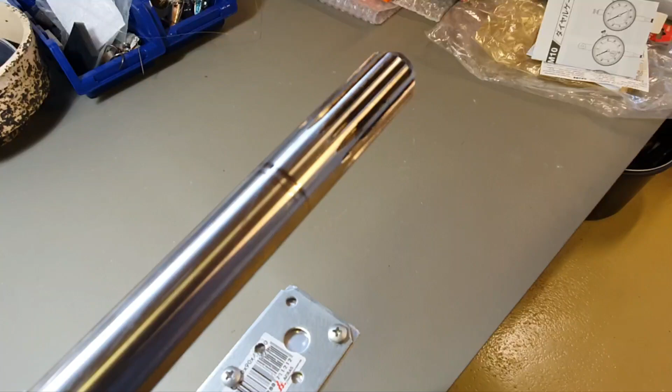Spoiled everything right in the beginning, but actually there will be a lot of specific things you should take into consideration when you design this.

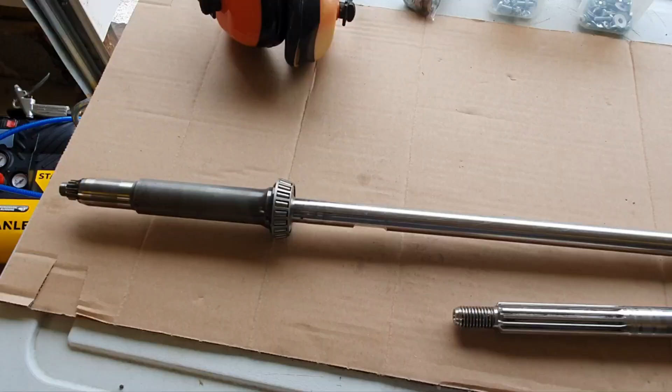So let's go. I got the need to check the drive shaft and prop shaft, and I was thinking, okay, I will go to the guy and let him do this for 10 euros per shaft. But then I decided, no, I want to try something myself, to be fully independent when I'm trying to fix my lower unit.

I did so much things about this lower unit, I have a lot of videos you can see in the description below. And I think, okay, next time I hit the rock, probably I want to repair everything myself and be able to check even shafts myself.

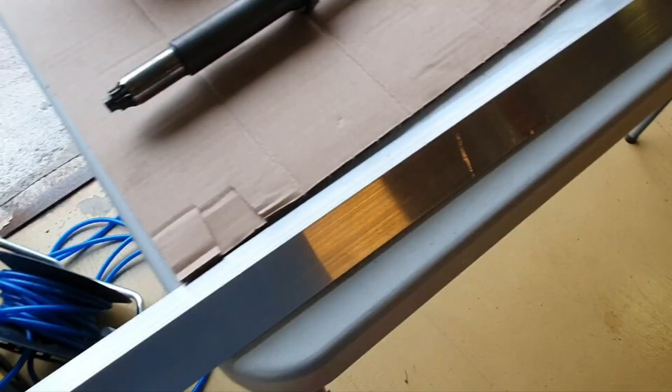And I start thinking, okay, I just got this one for 22 euros. This is the biggest part of the project, the most expensive it was, but I bought it.

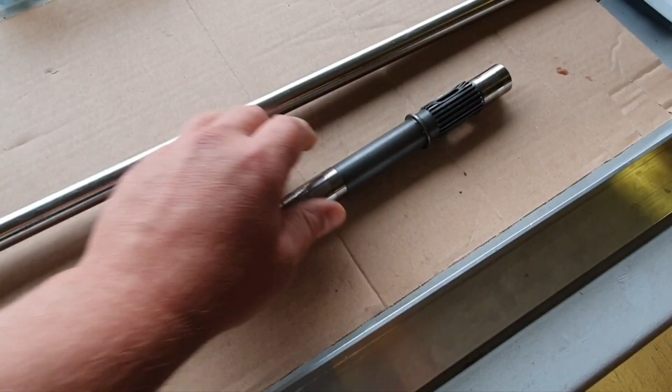Okay, the next step was to cut it to the right size. Unfortunately, I didn't film that video, but it's just about figuring out what length you need, where you install your drive shaft, because it can be different length, and then the prop shaft you will install in the middle. You probably already noticed in the beginning.

Yeah, I don't cover this much again, it's quite clear for you, you are smarter than me for sure. So we just cut to the right size we need.

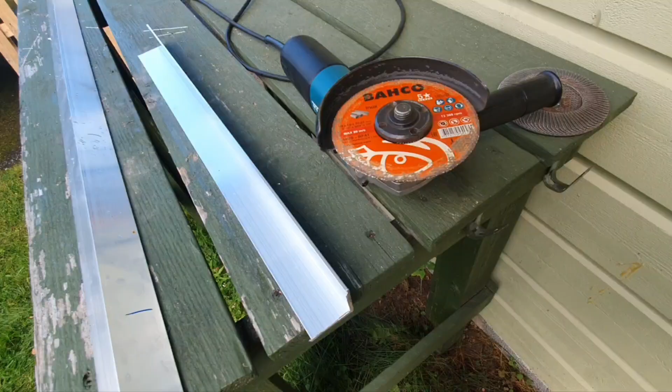Check twice. You need to know where will be your testing point and the holding point. Well, I cut it, I didn't show this because it is understandable how to do this with this stuff. And now I will make edges clear with this stuff.

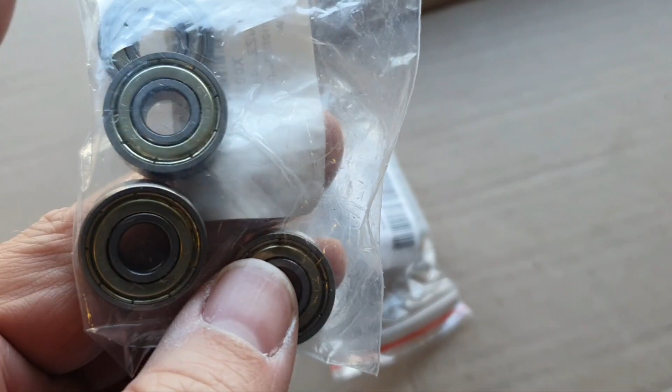Okay, I got bearings very cheap from Amazon. They use this in skateboards. Yeah, I will use them soon, you will see.

Let me explain the idea behind my invention, and you can decide whether you want to watch this video till the end, or just stop and say, hey, the guy from Finland, what are you talking about, you're a stupid guy. But if you think that I invented something interesting, yeah, okay.

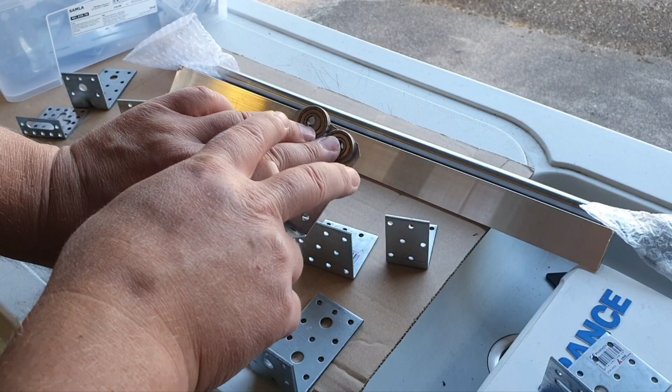So look, my idea was that I collected different kinds of angles, because I was thinking I don't want to drill anything. I want to find the right angle where I can see the right holes at the right distance, so that I put bearings at the right distance.

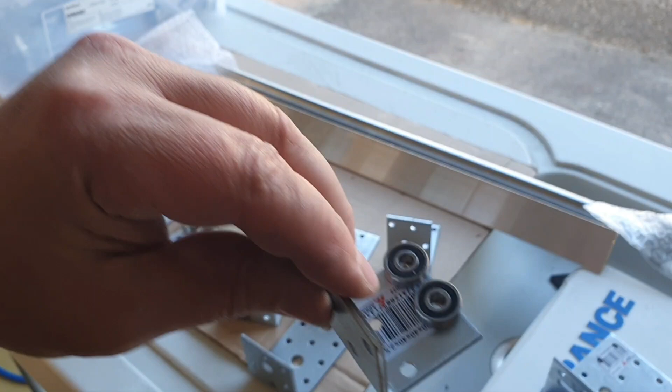And now the idea is that I put the shaft there, either prop shaft or drive shaft, it's there. So I was thinking that I will use small bearings for the drive shaft and so on. Yeah, but now I see that probably, well, I don't have actually the right angle, that I don't need to drill, so I think I will need to drill it anyway.

Yeah, but the idea was that I wanted a universal rig. So where I test the prop shaft here, I have the low profile angles. Is it angle or triangle or angel? Not angel, of course.

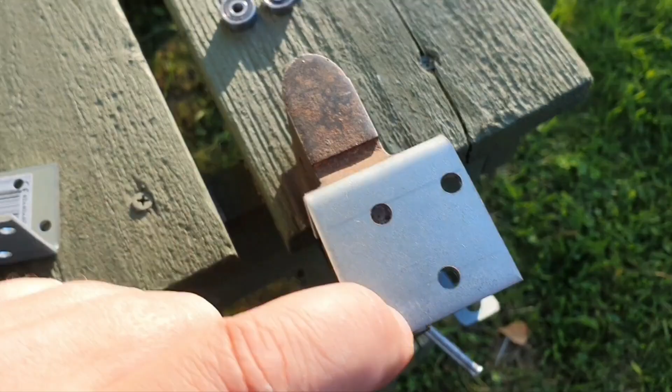I cut off the metal, and I think the prop shaft has space here. Yeah, that I cut, it was just a few seconds, really quick.

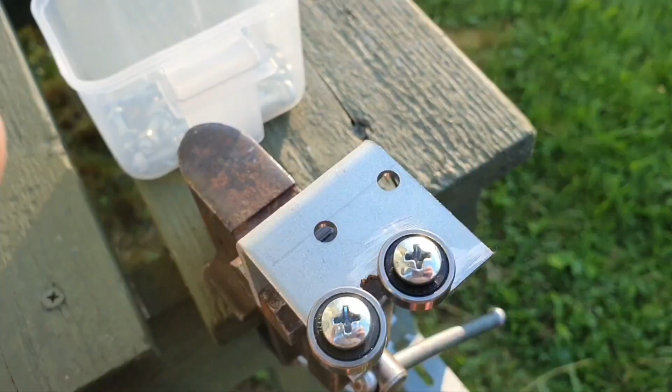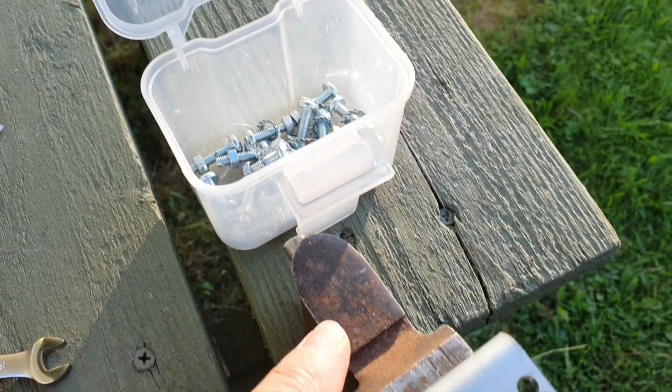The point is that I wanted to buy the bearing with internal diameter close to the holes that I have and the bolts that I have. I don't remember exactly the diameter, probably it's 5 millimeters, because I don't want to drill anything. Why? Because drilling, we want everything to be on the level.

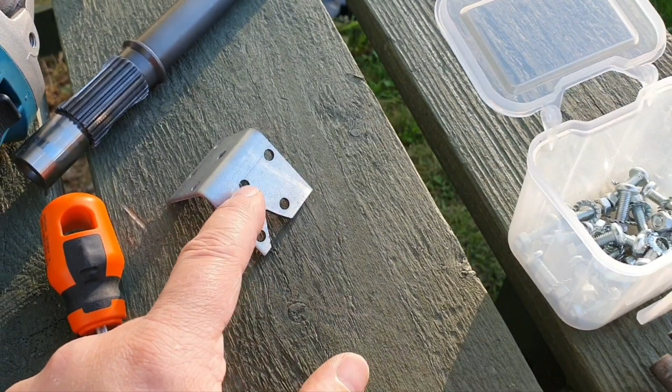When we put the drive shaft here, I think it's clear that we put it here. So, and it's more difficult to drill holes from this surface at the same distance on one and the second angle, than just removing the metal here.

So I wanted to use existing pre-drilled holes and bearings that will fit these holes, and bolts that will fit these bearings, that will hold them in the middle. Yeah, this is the right part of the bearing where it should be held when you tighten them with the nut.

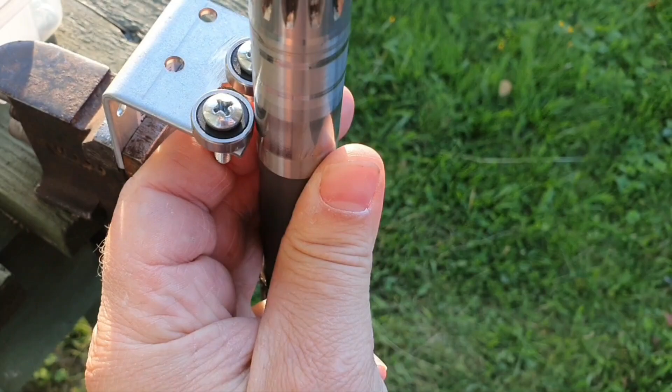So you got the point, yeah? If not, you can watch this. So we put the shaft here, it will be rotating. We want the same level.

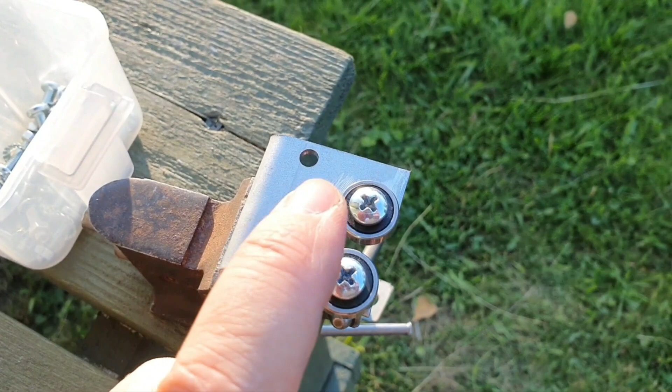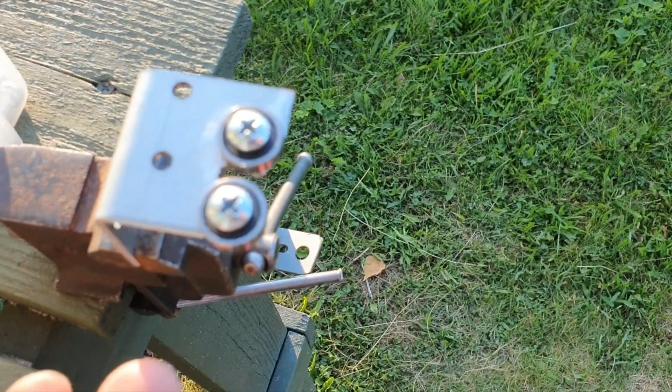Once again, pre-drilled holes are better than drilling them yourself, because, yeah, I'm quite lazy, I told you. It took me just a few seconds to remove this metal.

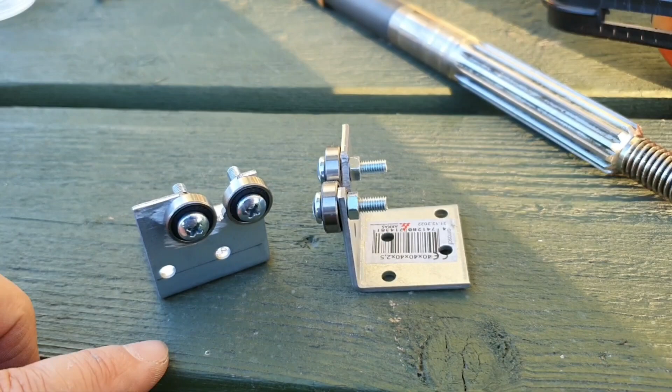Well guys, we now have two angles with bearings, and you can understand that from this surface to this one we have absolutely the same dimensions because the holes are pre-drilled, and we have them at the same distance, but unfortunately they are not symmetric.

I didn't figure out that they are actually mirrored, so I have to place them on my rig, on the aluminum angle, at the right distance. I probably want to find another angle where I can do them symmetric. But you got the point.

So we want to have pre-drilled angles. We don't want to drill new holes because it's quite difficult to get the same dimensions. If we use the existing holes, we have dimensions from here to here, the same on both angles without much care. We just need a few seconds to remove metal in the middle, and that's it.

But unfortunately, I was quite stupid. Do you think I'm stupid about this?

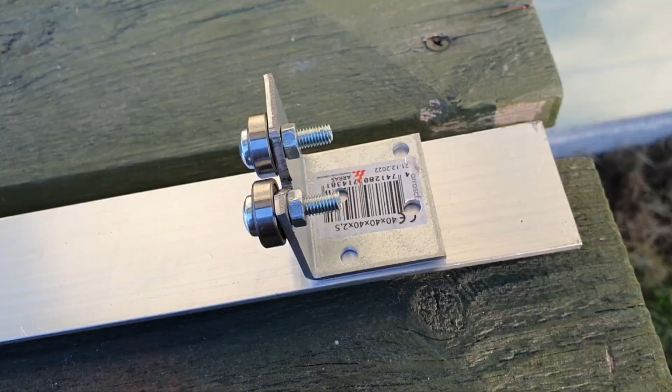Let's see. Look guys, if we put this here, it's exactly the same width. Very convenient.

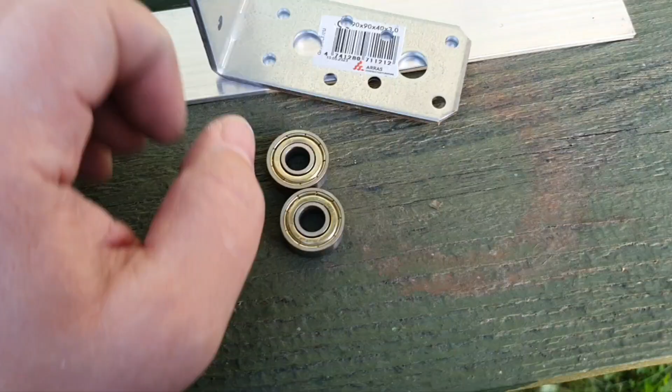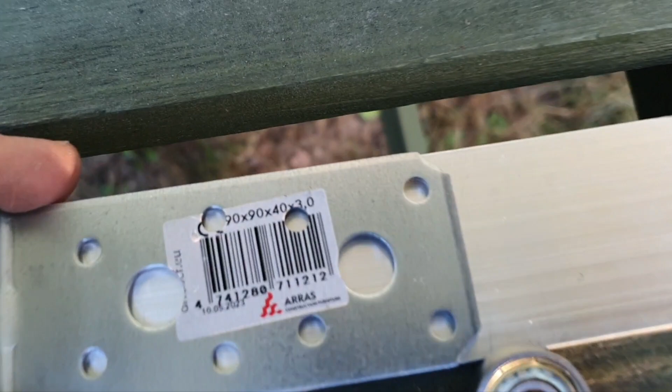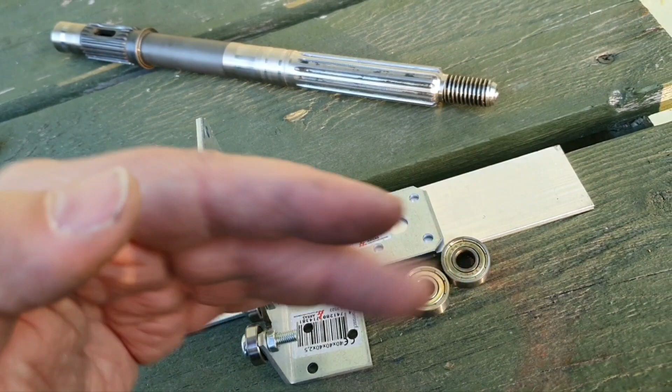Remember I have the bigger bearing here, and I think I will use this angle. I don't even need to remove any metal. I'll do this, it's quite an easy job, but this angle is exactly the same as this profile again. By the way, I think it's 40 millimeters, and it's higher than this one, so we can check the prop shaft here and the drive shaft up here.

Well, definitely that is better than with the metal. It took just 30, maybe 20 seconds, not difficult at all.

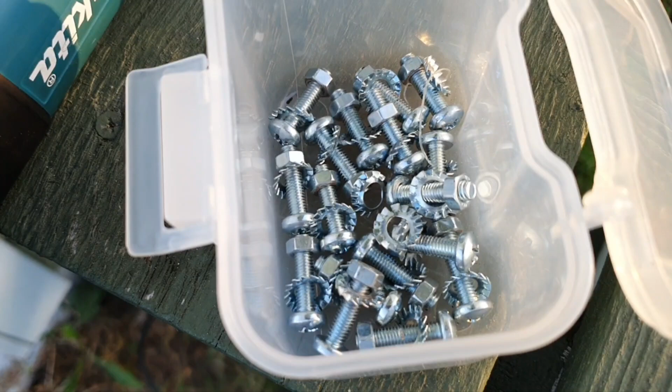Well guys, the hole is the same diameter, the bolts are the same, but the hole here is bigger than here. So what do we do?

Yes kids, the washer. It was easy. One point, because the internal diameter is bigger than this hole, we have some movement, some free motion, and we need to centralize this washer because we want to have absolutely the same plane here and on our next angle. I think it's quite clear.

Our drive shaft will be here. I think you got to the point.

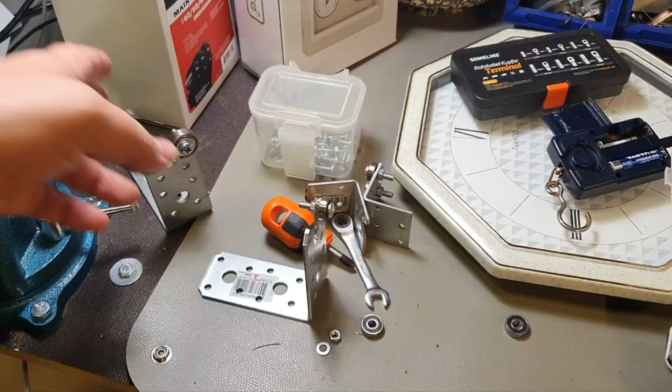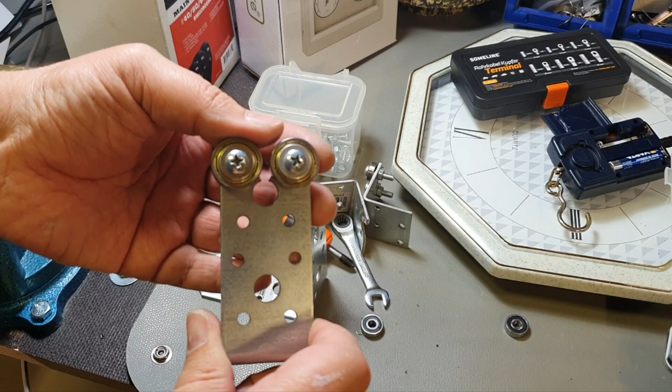Well guys, I didn't like these big bearings, they are not rotating well. Later I realized this is probably because this surface touches this surface of the angle, and that's why it stops free motion rotating.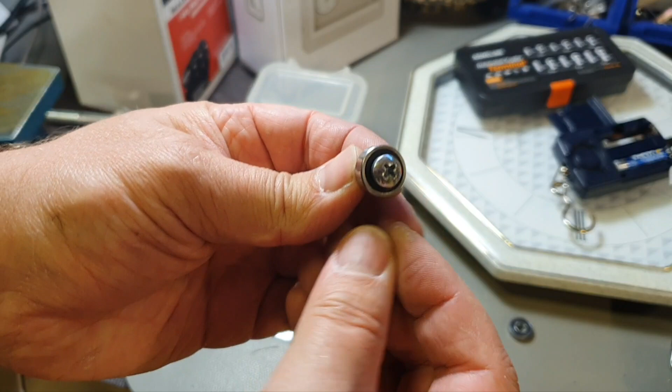So a small one which will be in the middle of the bearing, so it will create a standoff from the surface of the angle, and then you will definitely have free rotation. I will go with the small one. I like it, it doesn't matter that they are small.

I remove this metal from here, you put the shaft here, no problem. I don't see any problems.

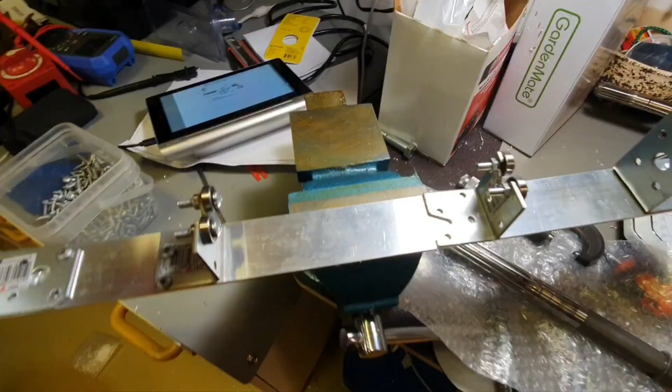So let me check again the user manual, the service manual. And you can see the test points B. Yep, they should be this one and this one.

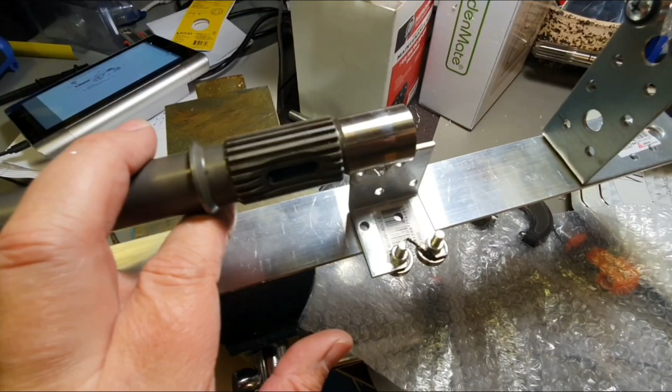We have this wonderful rig to test the prop shaft and drive shaft. Next, the idea is that you make it perfectly level. I have this bubble level here - yeah, it is leveled. We put the prop shaft like the manual says, here and here, and now we can easily rotate it.

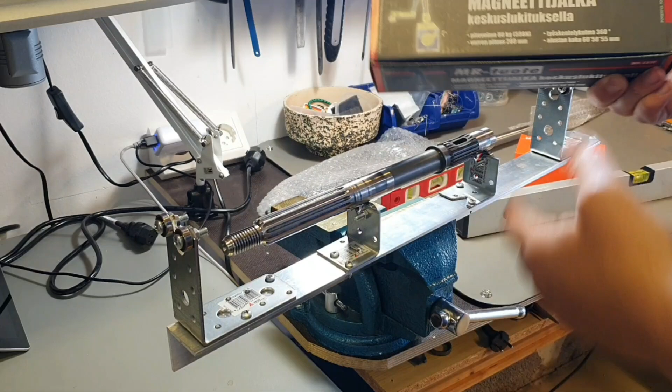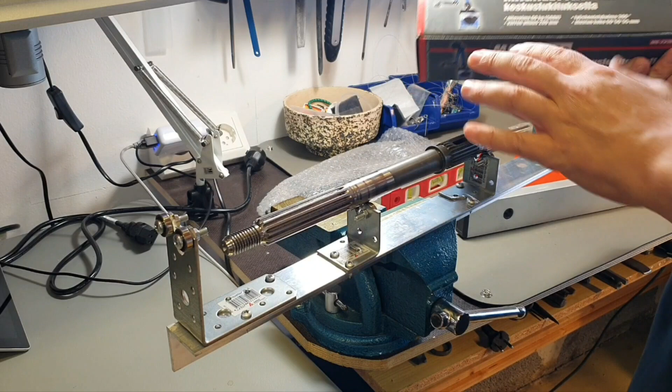I wouldn't call this a special tool, because if you do other jobs in your garage not related to the outboard, you probably have these tools already. I say this because I have another video covering all the special tools you need for this gearbox, for this lower unit.

But this one I wouldn't call a special tool - it's just the leg that holds, a magnetic leg. Can you see it? Yeah, that will hold another tool. It costs around $30, depending on design and quality - not much quality here, just some Chinese rebrand. So about $30, 30 euros, doesn't matter, from eBay, AliExpress or somewhere.

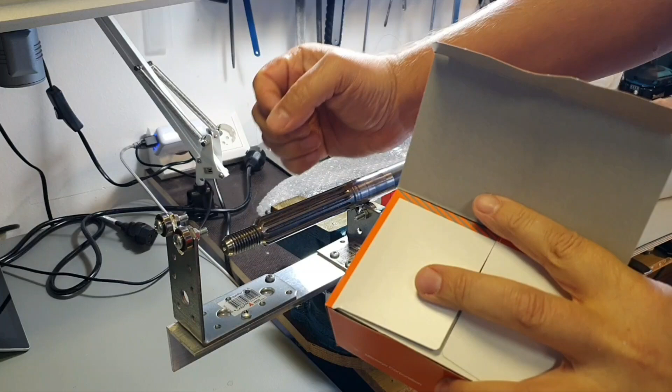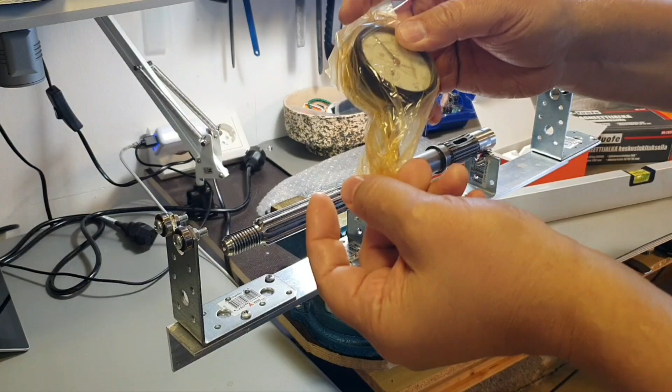Then we come to the dial indicator - Mercury has their own, which is expensive. You will need this dial indicator when you install the drive shaft; some special measurements are needed. But you also need it here. Again, I wouldn't call this a special tool, because you need it for different purposes. If you are not familiar with this at all, like I was...

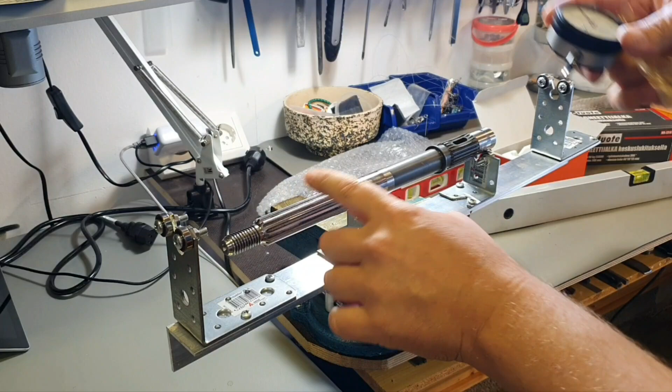So you can measure how - how is it called in English. Well, I will check later how it's called in English and continue with my video. I want to say you can use this tool for different applications, not just here, that's why I wouldn't call it a special tool either.

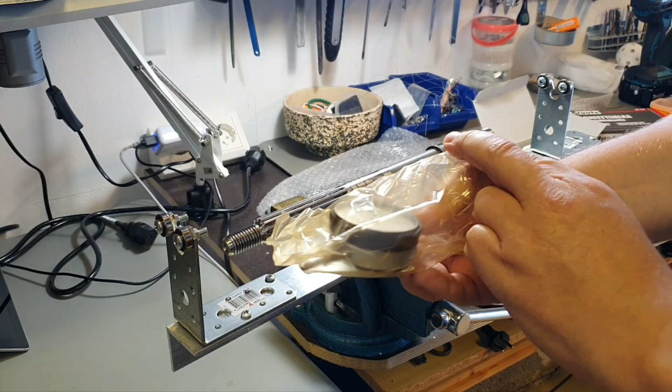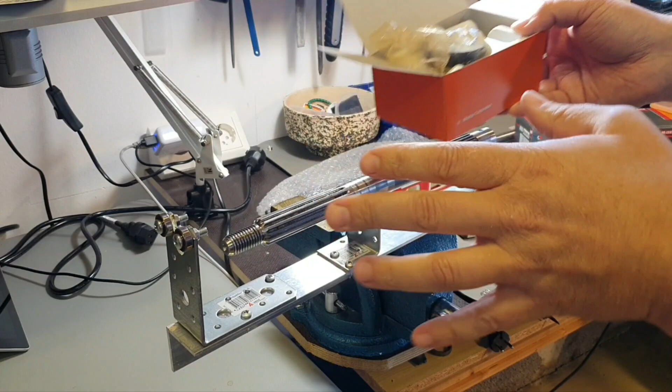I bought this Mitutoyo, I think - I don't know how it's pronounced. It is made in Japan, really Japanese, and it cost 50 euros, about $50. Again, you can buy something like this for 20 euros in different Stanley or other so-called brands that are actually just the same Chinese rebrand on Amazon or somewhere. So that's about the cost of these tools.

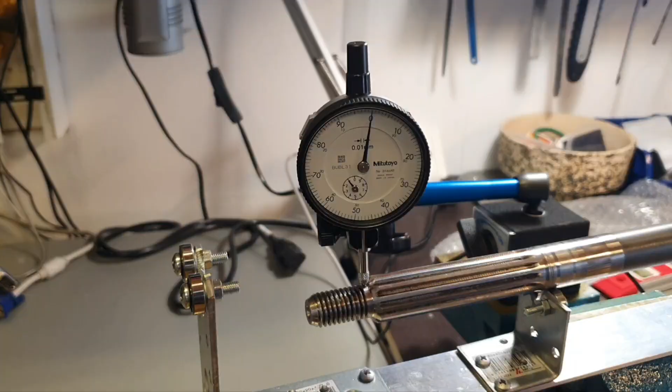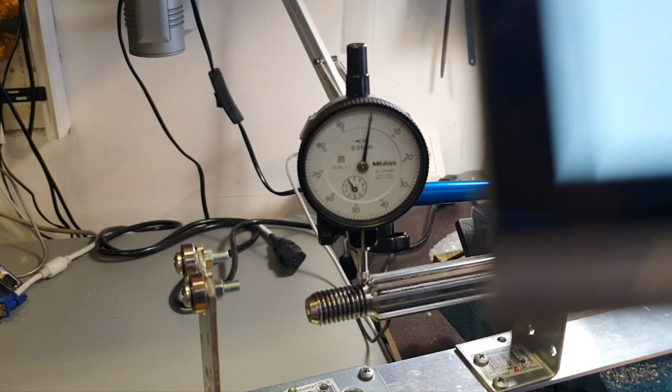Now I will do the setup and check the English words, then continue. Okay, it's called wobbling, like a wobbler. Wobble, wobble - so about the wobbling, the documentation says to check it, and it should not exceed 0.152 millimeters.

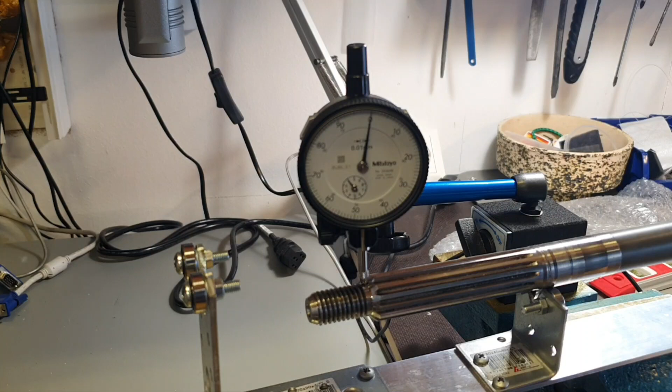So we install the tool here on this surface, like you can see, as shown in the service manual, where you should test it. And yeah, I think it is set. We set the zero here. We can rotate this frame, this knob there - I think someone else knows better how to use this tool and install it, because my video is mainly about this rig.

And now you can see it's almost perfectly good. I can show you that it works when I move here - yeah, you can see changes. So it means it's not wobbling, at least not more than what's allowed. Yeah, you can see this rig works. Wow, I'm surprised I can do something that actually works.

Not like my English, but well, let's try the drive shaft - I think the long one. That's, by the way, where you will need this indicator again, here when we install the prop shaft with another special tool. It will be later - please subscribe and see later.

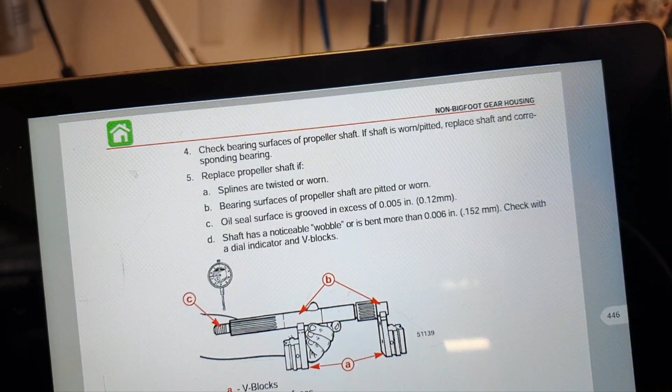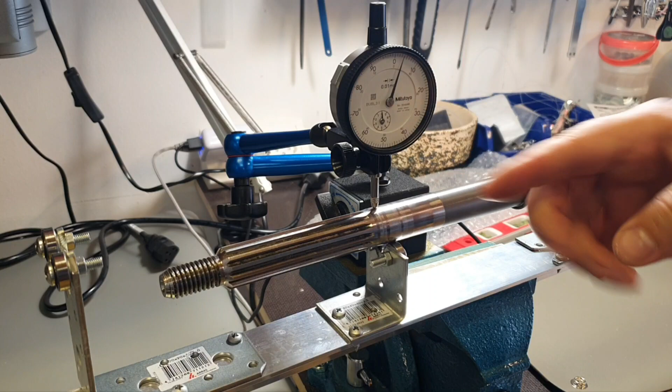By the way, the documentation also says that regarding the oil seal surface, you should replace the prop shaft if it is grooved exceeding 0.12 millimeters. You can read it here, and the oil surface is here. If you place this tool here and do this movement, you can see changes in the surface - we see almost nothing, so it's fine, the oil surface is fine.

I can show you that it works, because if I move here where you have the splines, you can see the indicator shows this difference. But here there is no problem - it's far from being 0.12 millimeters, far from this dimension requirement.

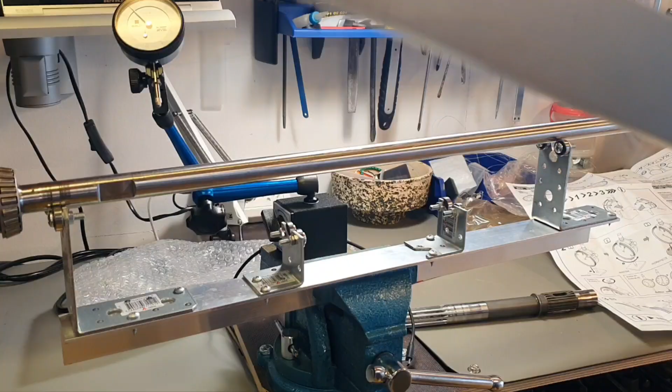So, let's try the drive shaft. I first do the leveling here - I put it directly on the drive shaft. I believe it's straight, yeah, I just relax, release. Guys, I don't know how this equipment is called in English, forgive me, but I think you understand what I'm doing. I'm just leveling this one here - yeah, so now it's leveled.

By the way, I didn't find in the documentation about the drive shaft wobble allowance and the points of testing. So if someone knows, please let me know in comments, but I will check anyway. I will try this point and somewhere there, and I will take the same value that is used for the prop shaft. I think it's quite enough, but it's good to know exactly.

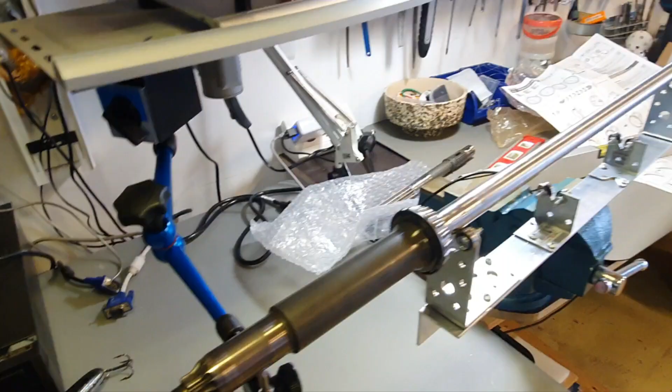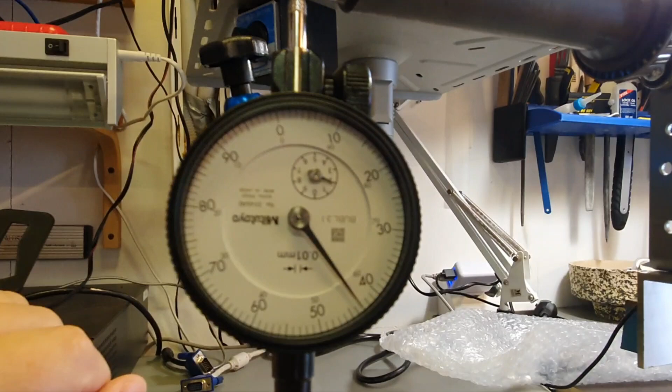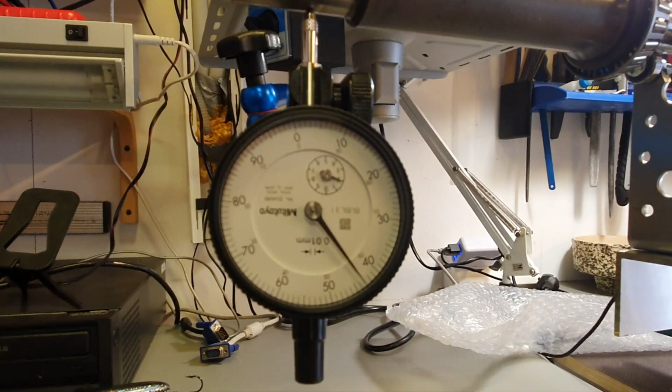I don't care about the zero here because, well, you understand, we don't need the absolute value. It's about the value, not the absolute position. That's why it doesn't matter.

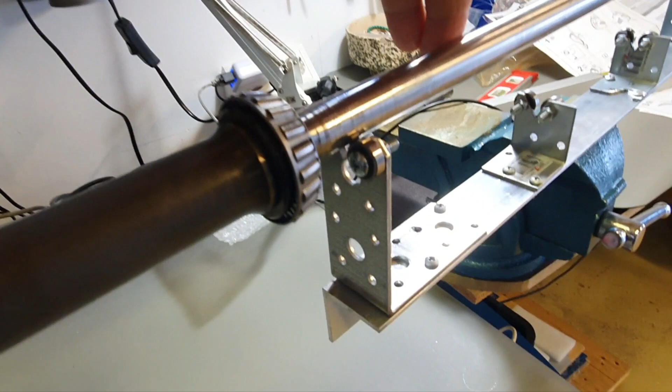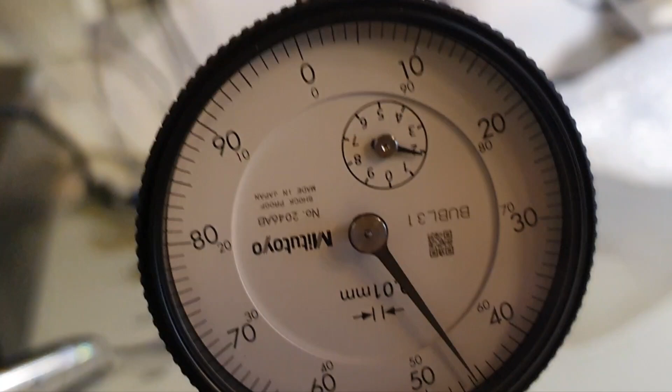So I'm just slightly rotating, and you can see why bearings are good for this job, because I can do this very gently. You can see it touches here, and I don't believe that it's so perfectly well. Probably something with the tool, but if you look at the video, it is perfectly well.

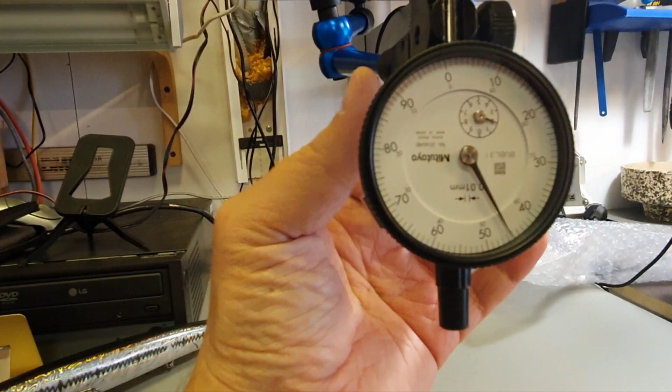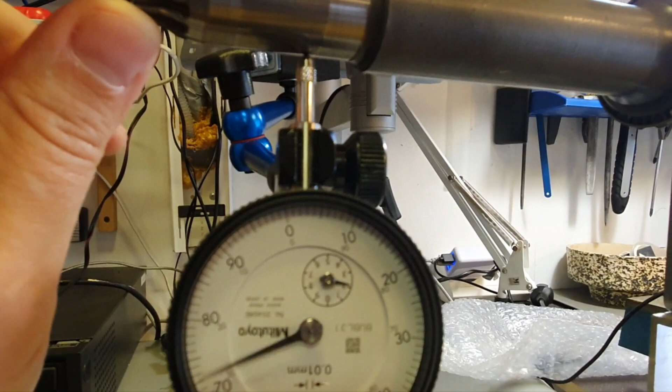If we don't trust this, we can always make some adjustment in the tooling. We can check it this way, and we can see it definitely creates pressure. So if we rotate and it has wobbling, we will notice for sure.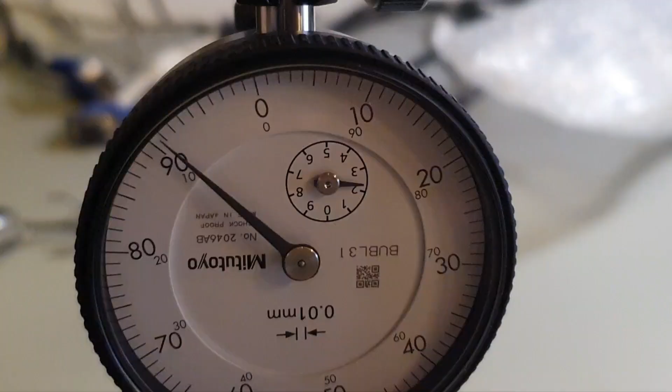So we are gently rotating it. Come on, come on, come on. Come on. And no wobbling. I don't want to test there, actually. It's perfect, it is perfect.

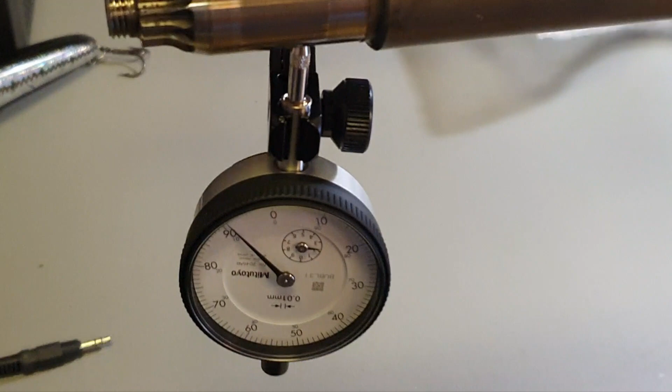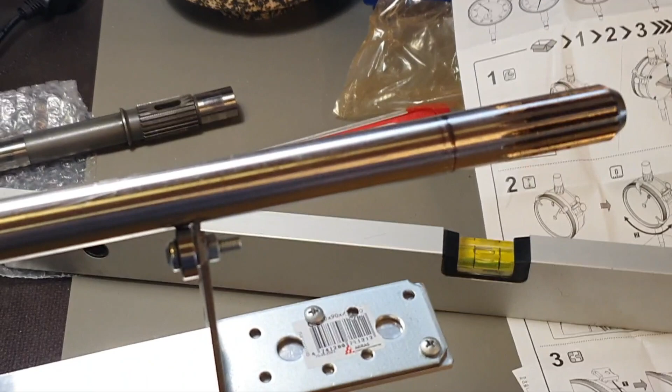I think you got the point. Did you like it? Yeah, I like what I created. It's good when you like what you created.

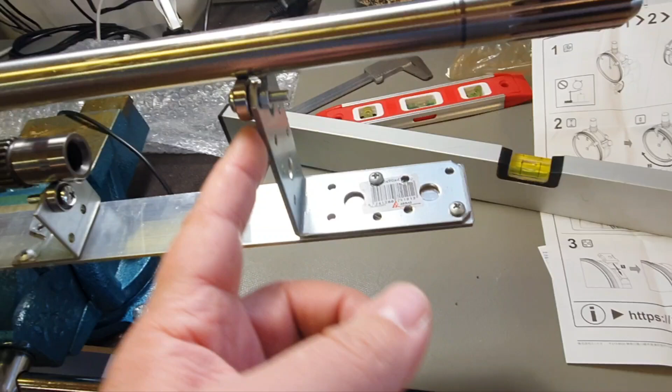So we have this aluminium angle, just a piece. We have these angles, and we have bearings from skateboards, 16 millimeters diameter outside, internal is 5. You need a small internal diameter which matches these holes and bolts, so that you don't have this axis motion, and so that you have the same distance on the first one and the second one. All we will need then, with pre-drilled holes, is just to remove a piece of metal here, and we are good to go.

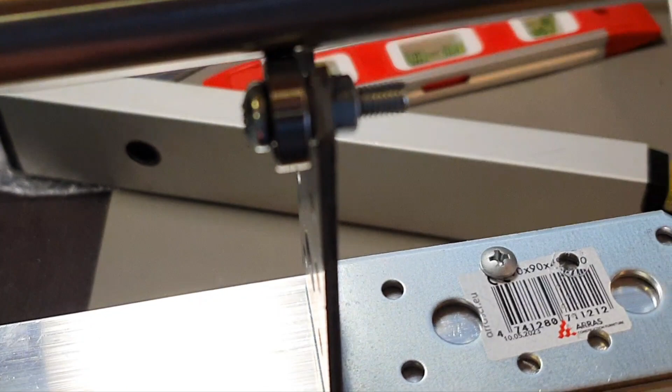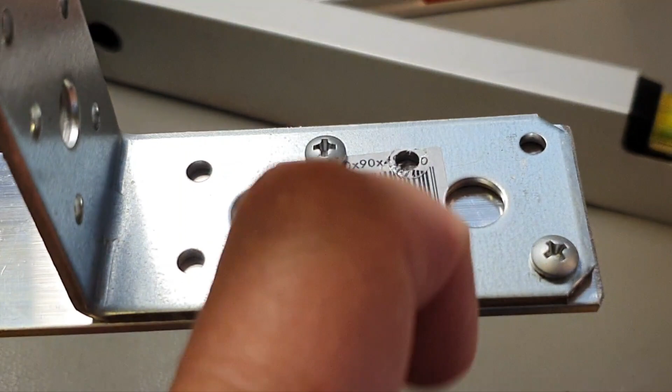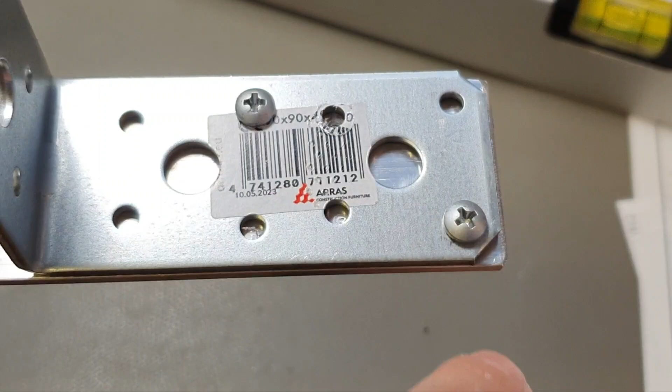So the length is up to your shaft. The lower profile angles are for the prop shaft here. I used a screw here - it's not safe, but I was lazy. There are a few nuances when you do this. For example, you need a washer here, because otherwise it will stick. And when you're trying to drill the hole, sometimes it moves, so you can see sometimes I made mistakes, but when you have a lot of holes, you can drill again and make it perfect.

As I noticed, exactly perfect level is actually, I think, not so important. By the way, it would be interesting to test it not level. That's a good idea. I don't know, if you want, I can test it for you. If not, I think I've covered everything.

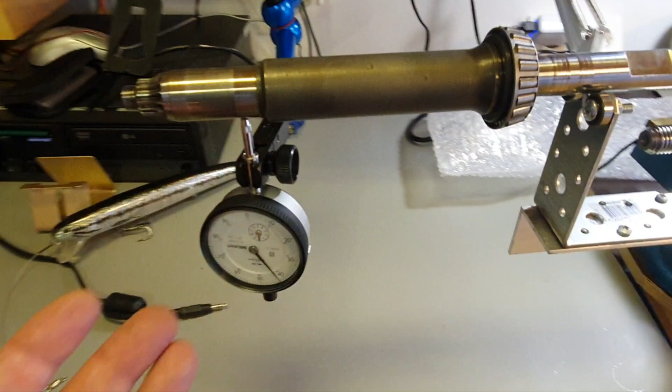About the tool - you can buy some Chinese brand for $50-60 on Amazon, a lot of this junk, but for the leg it's not so important which one you buy. I would point you to this knob, which is very interesting because you can either charge or discharge the needle. Do I use the right terminology now? Finally, at the end of the video, probably.

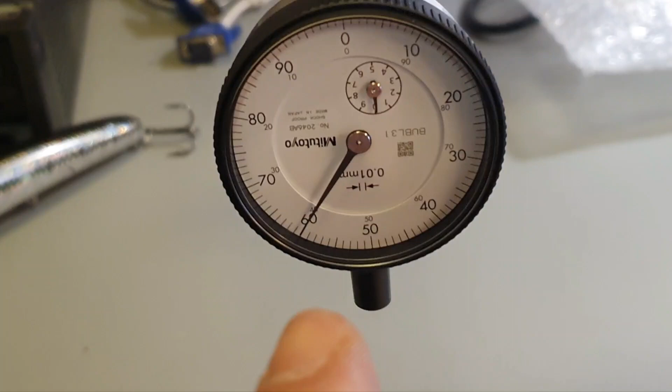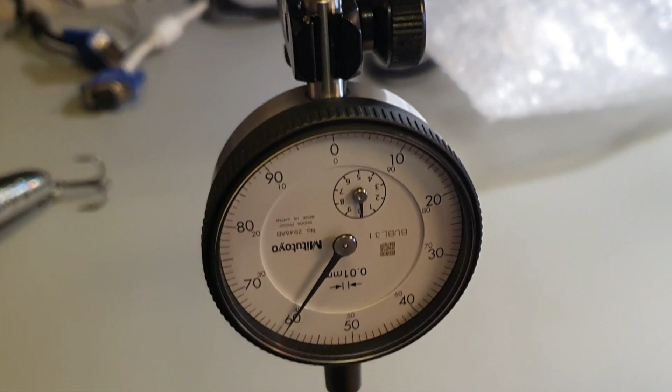And all other axis regulations and the magnet, I think they all work with the magnet. But as for the indicator, I decided to buy Japanese - it's just twice more, like 25 or 50, not much difference. I like to use good tools.